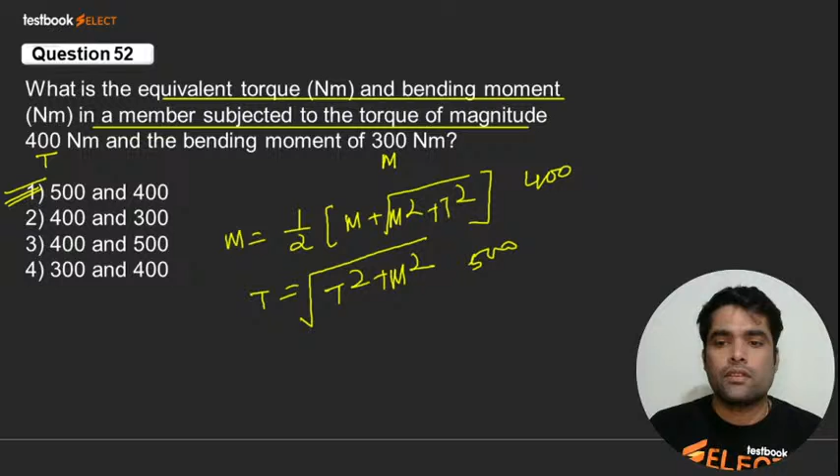A freely supported beam at its ends is loaded by a central concentrated load, central concentrated load, and the moment is M. Now, suppose the same weight is equally distributed over the beam, meaning UDL, uniformly distributed load, right? So the moment here, this moment is nothing but, if a force P is acting, it should be PL by 4, sorry, PL by 4 is there. Moment will be PL by 4 for the first condition.

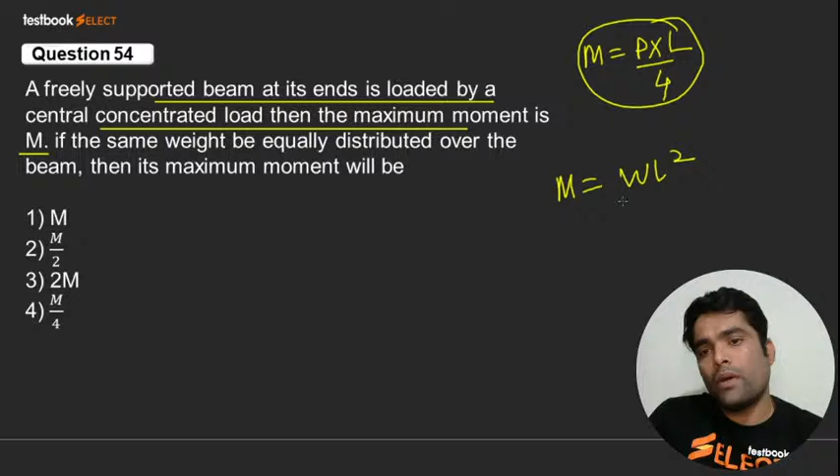For the second condition, it should be WL square by 8. But you should know that W into L is nothing but the total load, so it should be PL by 8. So PL by 8 compared to PL by 4, this is nothing but your M. So the answer will be M by 2. M by 2, very good.

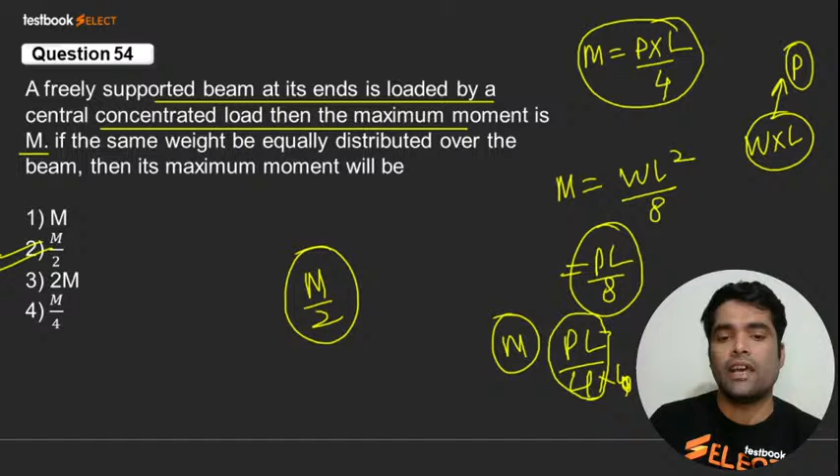No, it's not 3. Question number 54, question number 54, M by 2 is there. Here we go for the next.

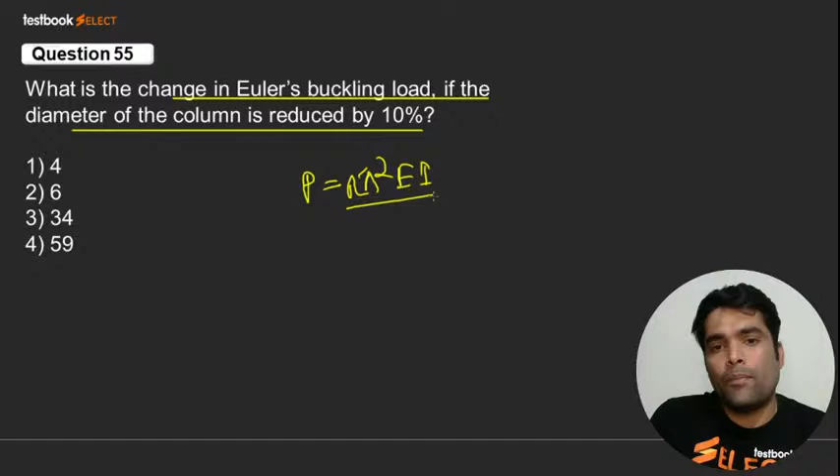What is the change in Euler buckling load if the diameter of the column is reduced by 10%? First of all, you should know the formula, right? So, P is directly proportional to pi square EI upon LE square, LE is squared.

That means P is directly proportional to I, and I is directly proportional to D raised to power 4, right? So I can say P2 by P1 equals D2 by D1 raised to power 4, and D2, since it's reduced by 10%, that means D2 is 0.9 D1 divided by D1, raised to power 4. What should be the answer? How much does this calculation give? The answer is 0.6561, this will come, right?

So if we take 1 minus, what is the change? So the change will be 1 minus 0.6561 divided by 1, so it should be around 0.34, something like 0.343, that is 34.3 something percentage, right? So it should be option number 3.

Here we go, my dear.

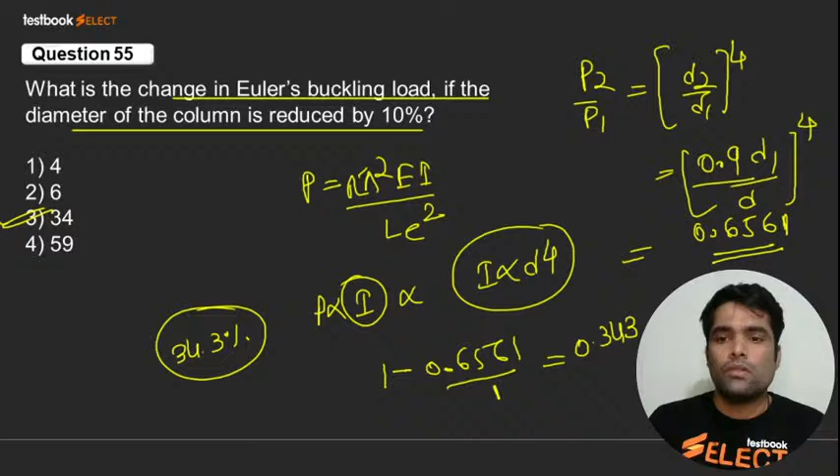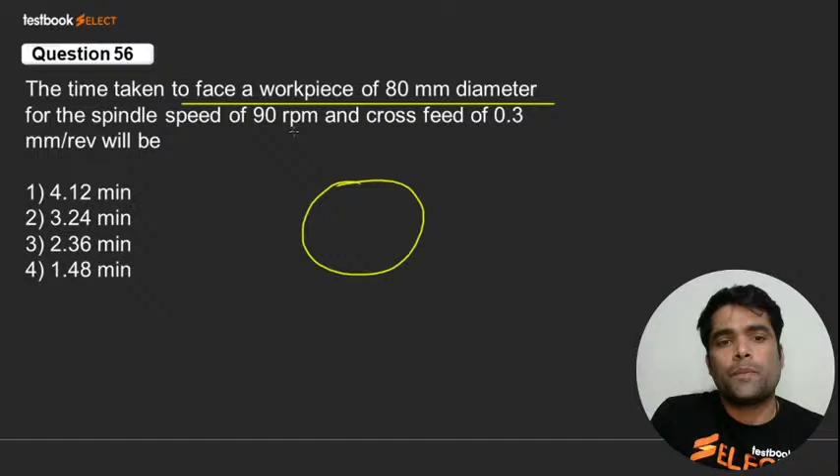The time taken to face the workpiece of 80 mm diameter. Spindle speed N is given, feed is given in mm per revolution. Time required for machining is L upon F into N. L is the facing distance, which here equals 40. F is 0.3 multiplied by N which is 90. So 40 by 27, that gives around 1.48. That is the answer.

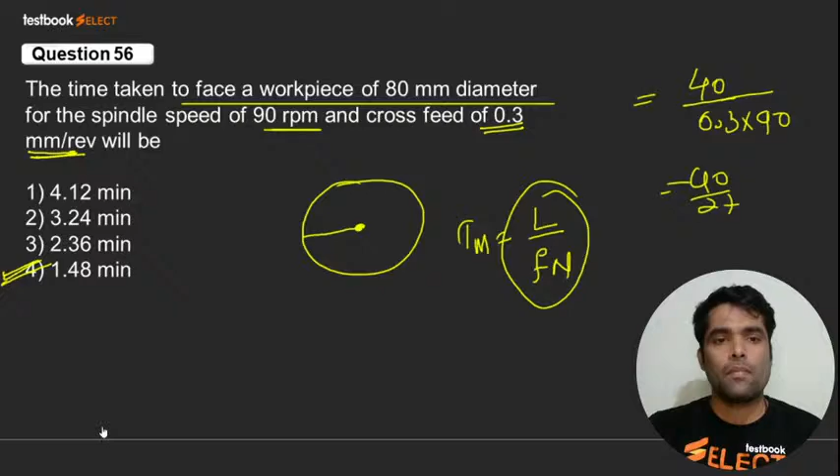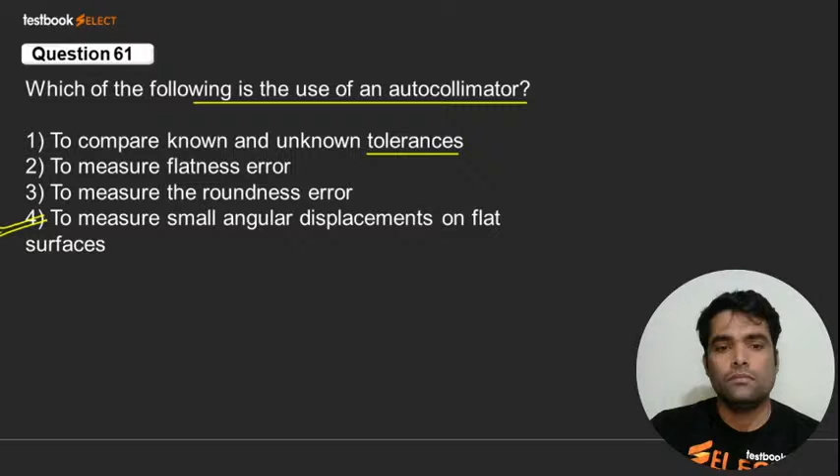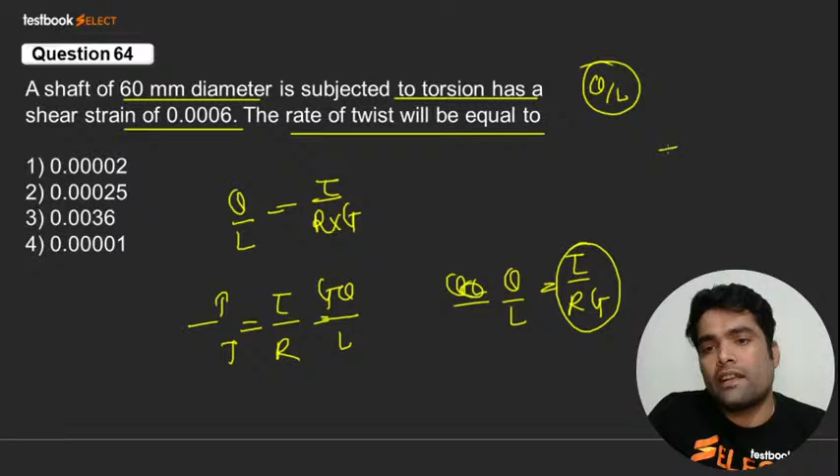It is none other than tau by radius into G, that is theta by L. From the equation T/J equals tau/R equals G theta/L, you can get this. Theta by L is equal to tau into R by G, and tau by G is nothing but shear strain. So theta by L equals shear strain by R.

Okay, one. Very good. Here we go for next.

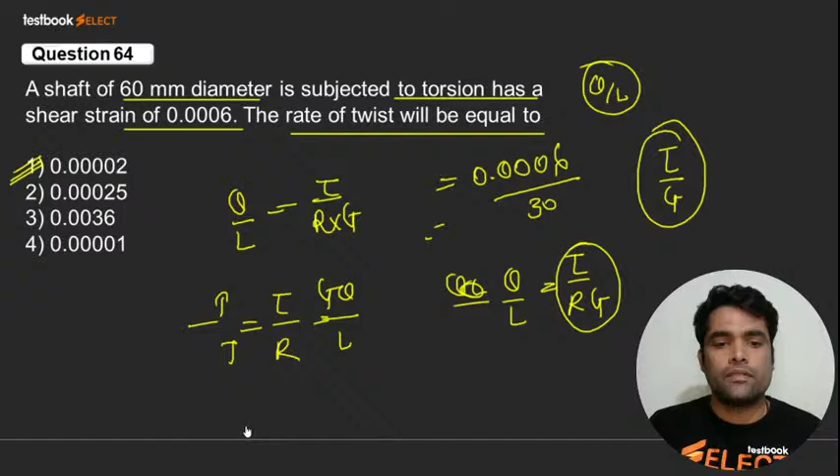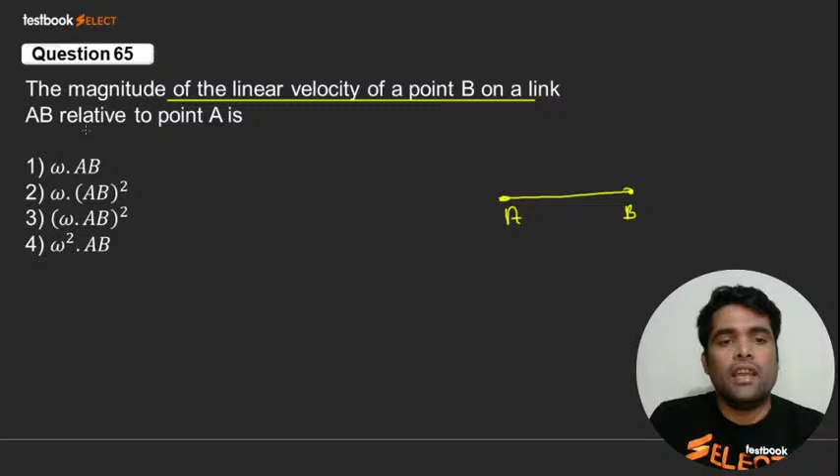The magnitude of the linear velocity of a point B on a link AB. Okay, suppose this is a link AB or BA, relative to point A, and we need to determine its velocity with respect to A. So what should it be? That is linear velocity, which is R into omega. R is nothing but the distance, that is the length of AB multiplied by omega. So it will be length of AB multiplied by omega. Okay, I hope you got it. Okay, here we go.

Okay, one is correct.

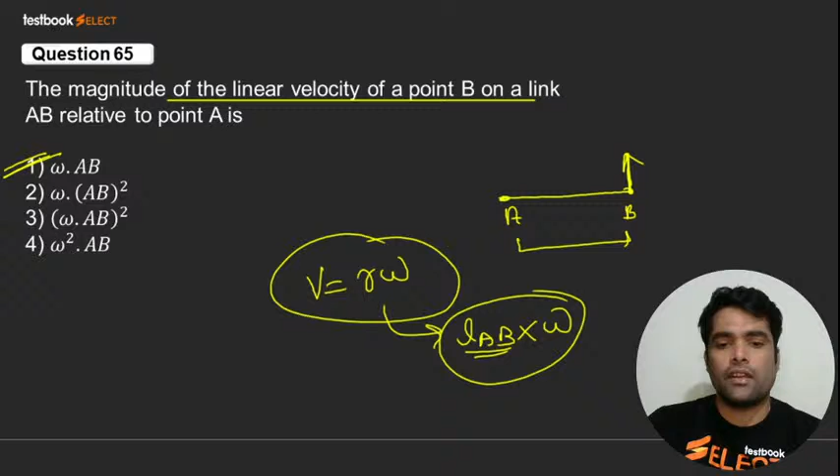Ratio of number of atoms present in simple cubic, body centered, and face centered structure. You know SC is there, BCC is there, FCC is there, HCP is there, right? Let me tell you in detail, each and everything. Sometimes you're asked the coordination number - what is it? 6, 8, 12, 12. And here they have asked, what, my dear? Number of atoms, right? So it should be 1, 2, 4, 6. Okay.

Atomic packing factor - what is it? APF, atomic packing factor, 52, 68, 74, 74. So what should be the ratio? That is 1 to 2 to 4. 1 to 2 to 4. Very good. Here we go for next.

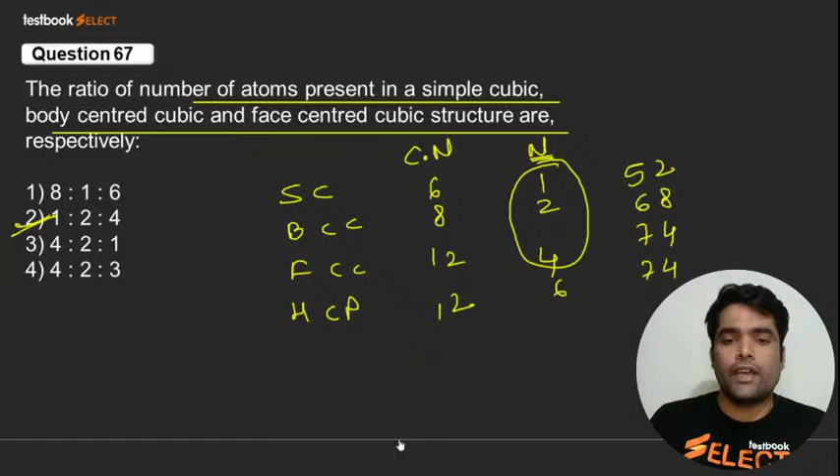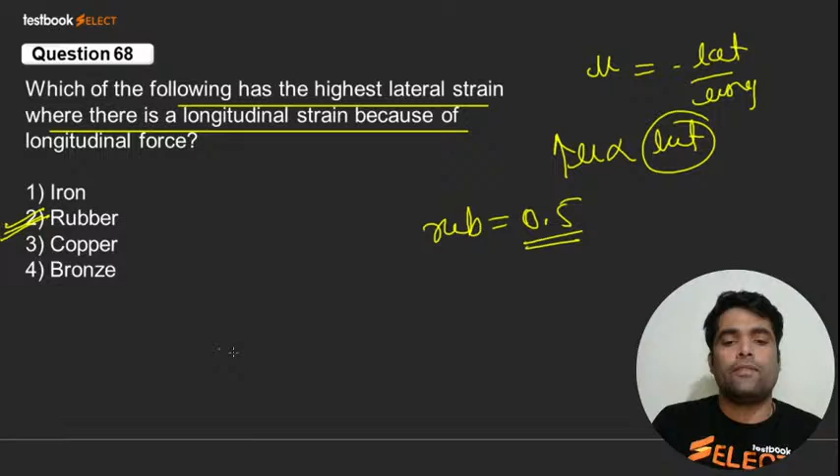Which of the following has the highest lateral strain where there is a longitudinal strain? You should know whichever has higher mu, because mu is nothing but minus of lateral strain divided by longitudinal strain. That means mu is directly proportional to lateral strain. So whichever has higher mu has higher lateral strain. And you know that for rubber it's almost 0.5 definitely. For copper, how much is it? Copper is 0.33, sorry 0.34 for bronze, 0.33 for copper. For iron, it is none other than 0.25.

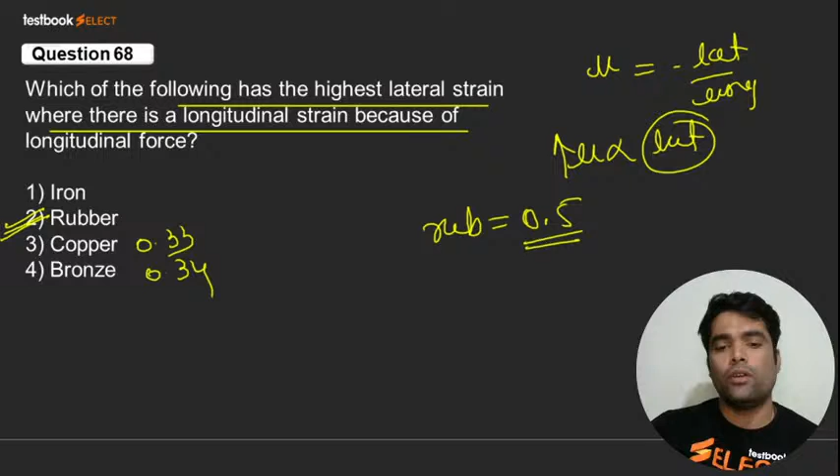Here we go for next, my dear.

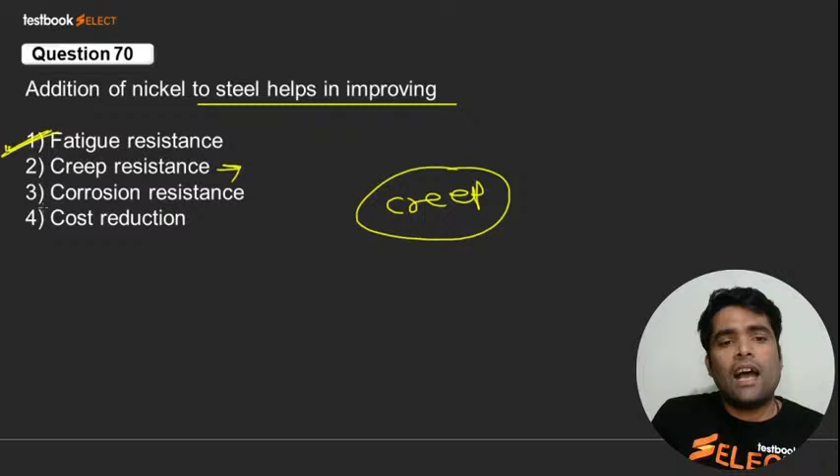Nickel improves fatigue strength. Okay, here we go.

Here we go, my dear. Okay.

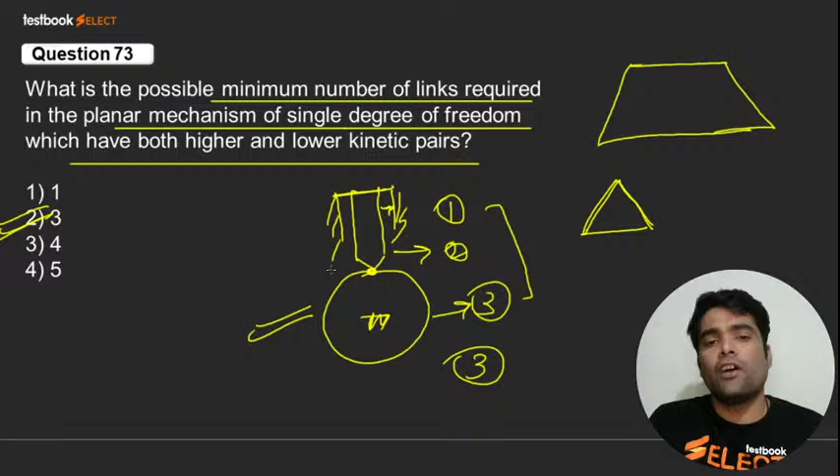Here we go for next. In a 2-stage wire drawing operation, the fractional reduction - that is ratio of change in cross-sectional area to initial cross-sectional area - in the first stage is 0.4, fractional reduction in the second stage is 0.3. The overall reduction, my dear, you have to tell me. Yes, can you tell me the overall reduction?

Be fast - so first, what is given to us? In the first one, we are provided with 1 minus A1 upon A naught, given as 0.4. In second, 1 minus A2 upon A1, that is 0.3, right? And what is asked from us - overall reduction, that is 1 minus A2 by A naught - what will that be?

You know that area is directly proportional to diameter square. So can I say 1 minus D1 square upon D naught square is 0.4? From here I'll get D1 square upon D naught square is 1 minus 0.4, that is 0.6. So definitely D1 is root 0.6 D naught, right?

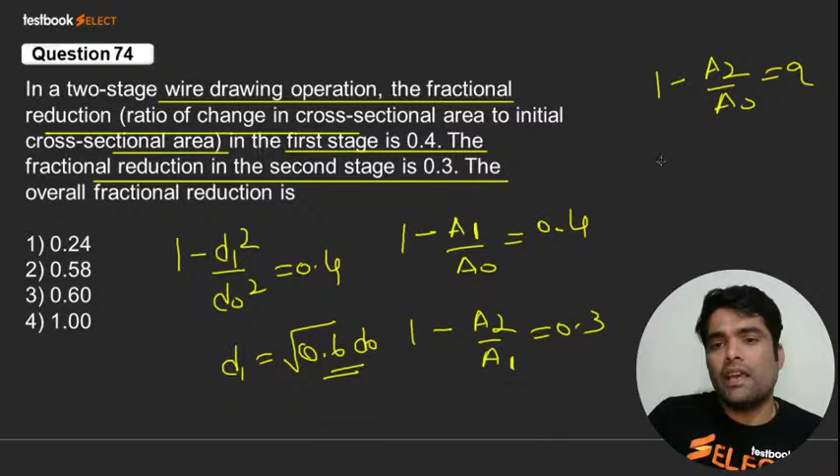From here I can write 1 minus D2 square upon D1 square is equal to 0.3. So here it becomes 0.7. That means D2 square is equal to D1 square into 0.7. So what am I getting? 0.6 into 0.7.

What, D naught square is equal to what, my dear? D2 square - yes or no? Just put this value over here and you'll get the answer. Here you got D2. So you put D2 square, that is 0.6 multiplied by 0.7, D naught square - these will cancel. And you are going to get 1 minus 0.42. So what will the answer be?

Something like 0.58 - yes, 0.58. Yes or no? Of course you got it.

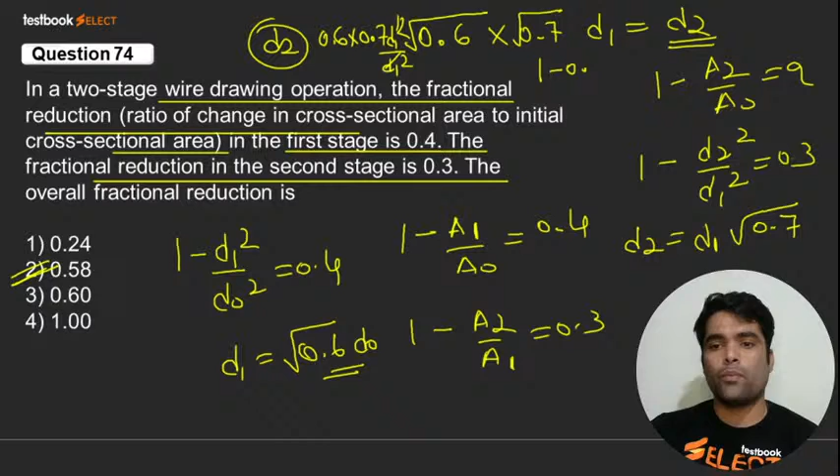Very good, 0.58. Here we go, here we go for next.

Consider the torsion equation given below: T by J, tau by R, G theta by L. What is the term J by R? Is it section modulus? No, it is polar modulus. Yes, it is polar modulus.

Here we go for next one.

When ordering cost is increased to 64 times, then EOQ - you know that Q is directly proportional to under root of CO, because we know that Q is equal to root of 2 D CO by CH, right? So this will be 64, so definitely it will be increased by 8 times.

Yes or no? Of course it is, right? Here we go.

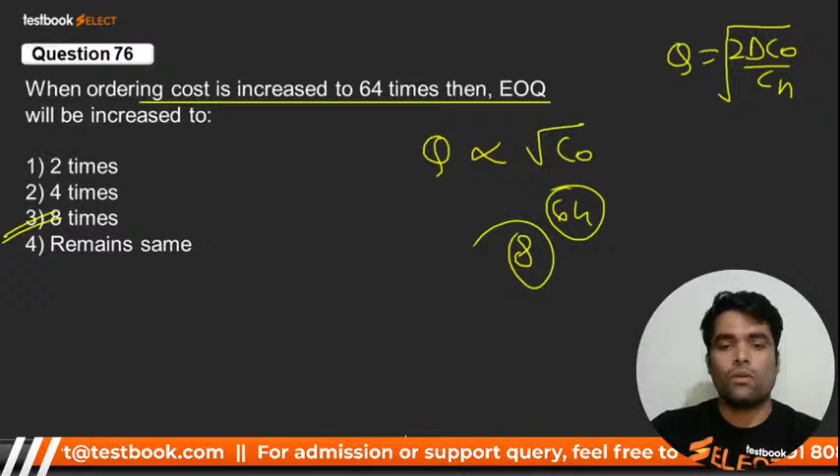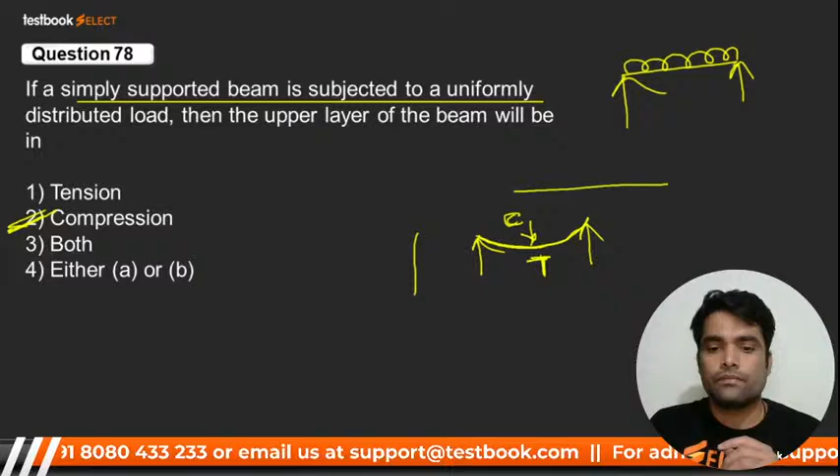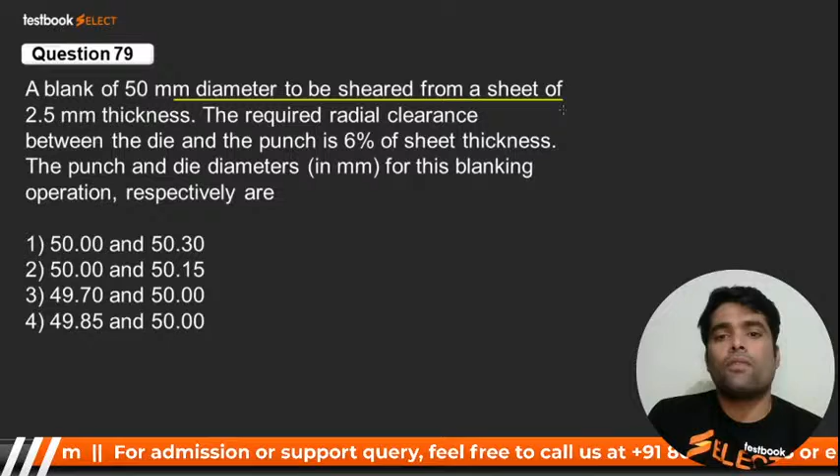A blank of 50 mm dia is to be sheared from a sheet of 2.5 mm thickness. The required radial clearance is 6% of sheet thickness. Okay, the punch and die diameters for this blanking operation - you should know that in blanking operation we have the exact size for the die. Die is of exact size.

That is none other than the size of the product. And punch size is nothing but die size minus 2 into clearance. Clearance is 0.06 multiplied by 2.5 - 6% of thickness is stated.

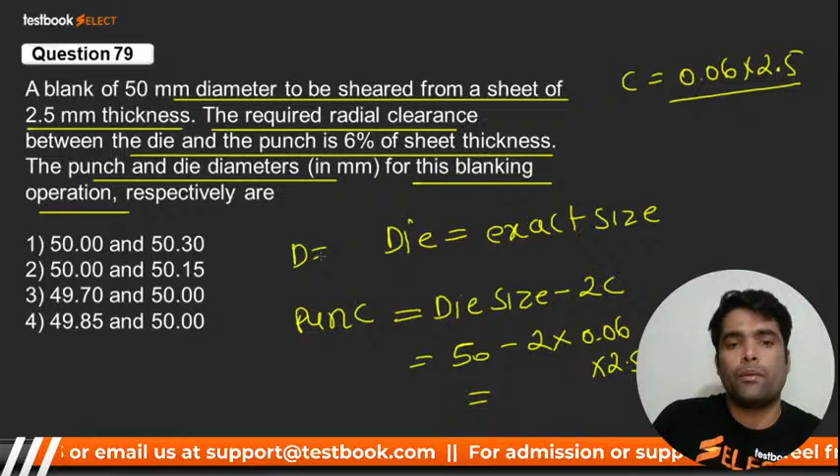Right now, put the value, get the answer. Die size we want is 50. So 50 minus 2 into C, where C is 0.06 multiplied by 2.5. This will be exact size, that means die will be of 50. Die size will be 50, right? So what is the answer? 49.70, that's what we're getting. So the answer will be - what was asked?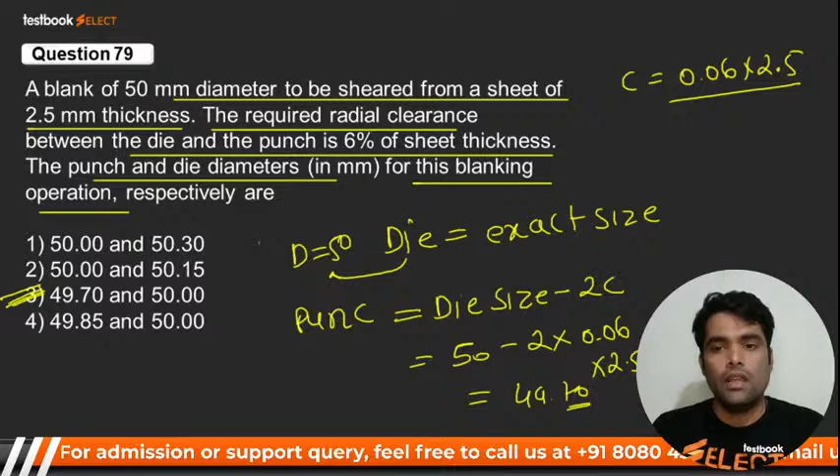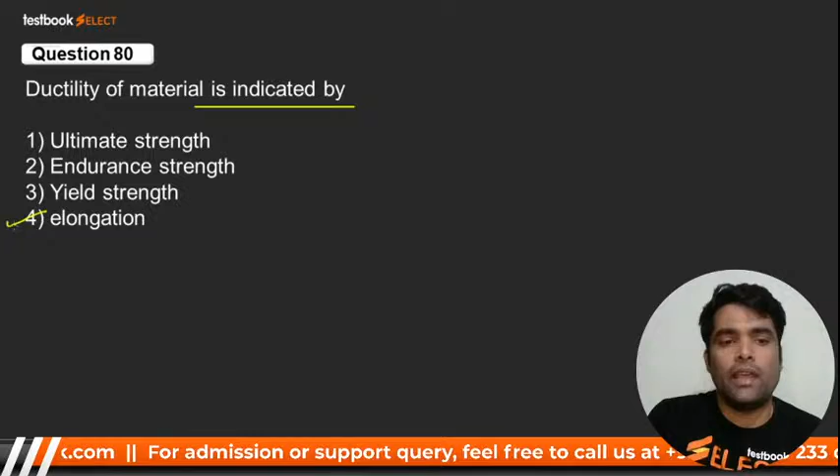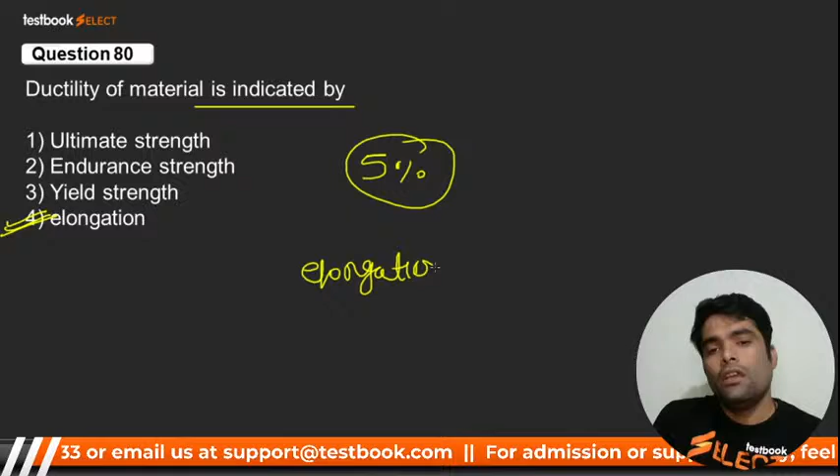Ductility of material is indicated by - which of these indicates ductility: ultimate, endurance, yield or elongation? Please tell me the answer. It should be elongation. If any material wants to be concluded as ductile material, we only conclude this when elongation is more than 5%.

Here we go. Elongation. Here we go for next.

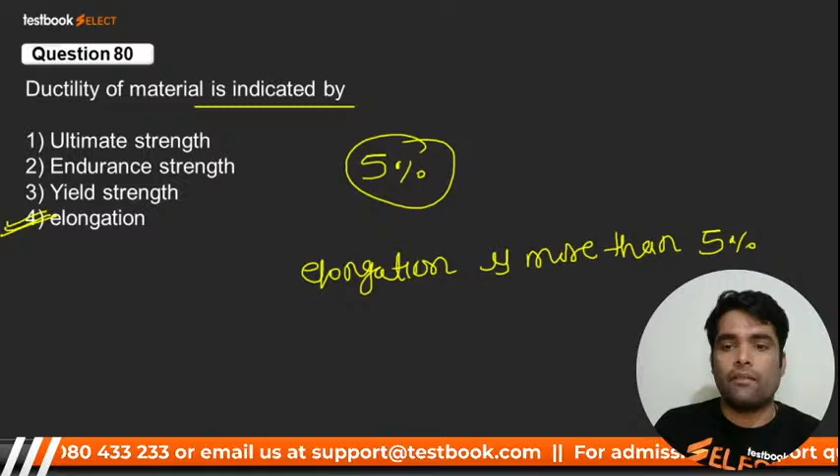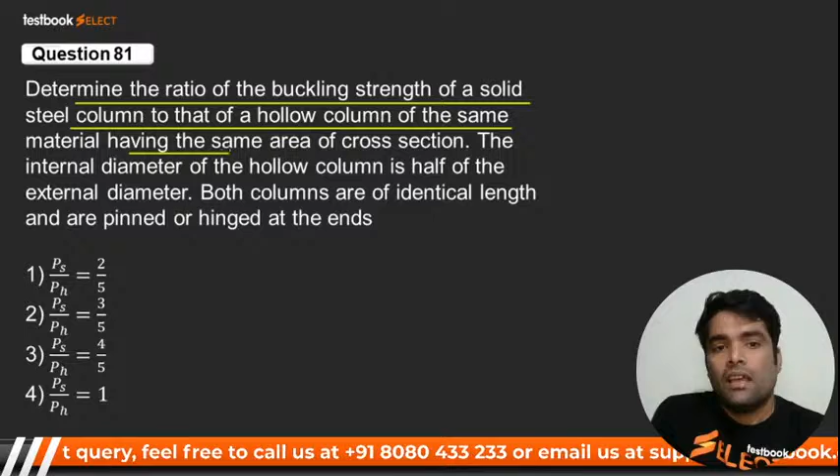Determine the ratio of buckling strength of a solid steel column to that of a hollow column of the same material, same area of cross section. The internal dia of the hollow column is half - DO by 2, that is half of the external dia, as stated. Both columns are of identical length and pin or hinge at ends.

Guys, please tell me the answer for it. First of all, you should know that I is directly proportional to load, right?

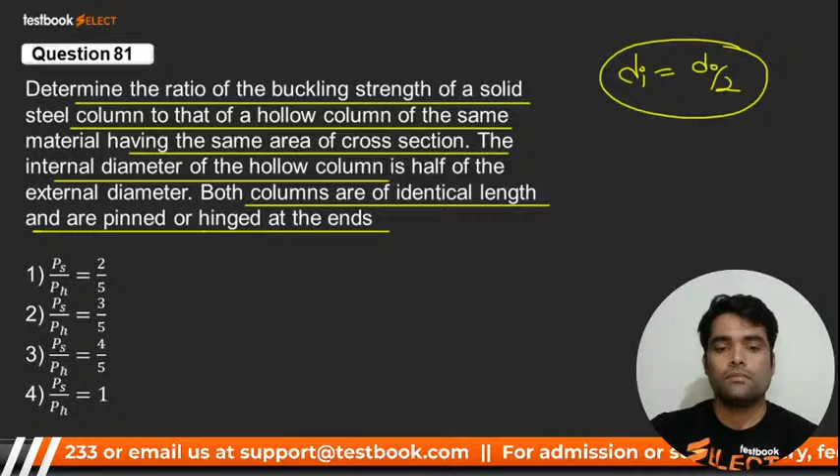P is directly proportional to I. I will not write the formula each and every time, we've already written it. And I is directly proportional to D raised to power 4. We've been asked PS by PH. So PS will be what? It will be D raised to power 4.

And what will this be? Solid hollow ka, that should be none other than what? D raised to power 4, meaning internal. External, D raised to power 4 minus Di raised to power 4. Yes or no? Of course.

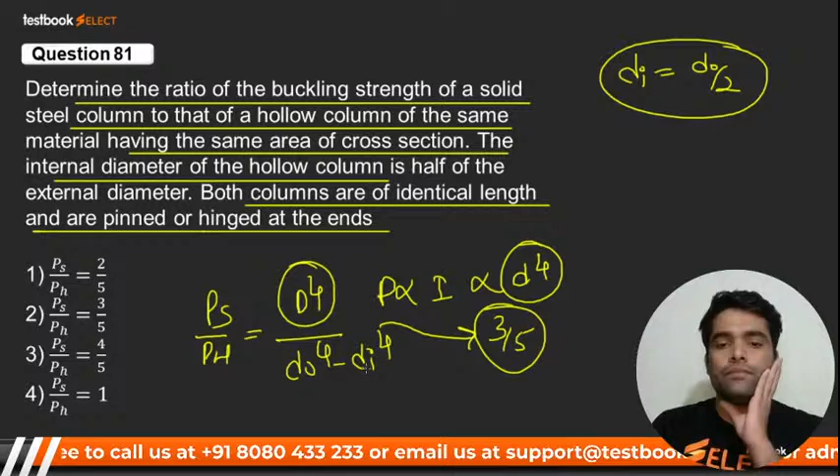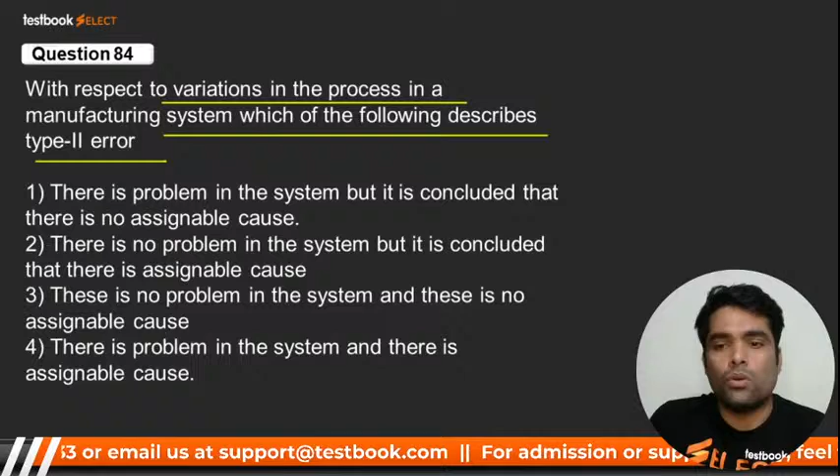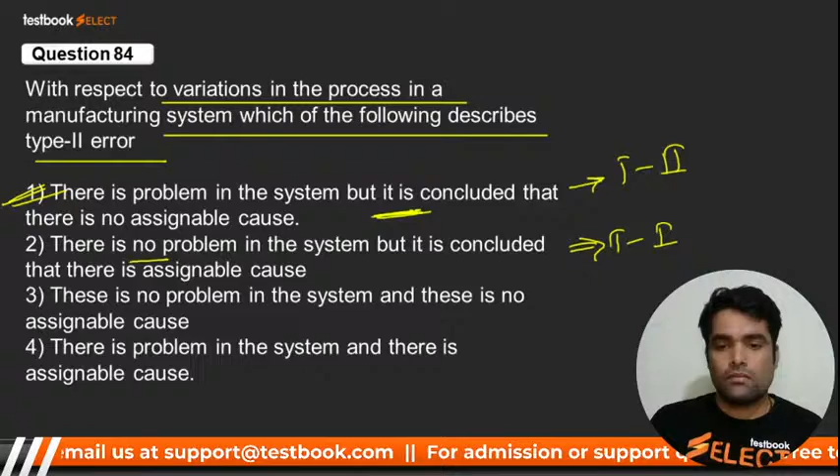Here we go for next. Yes, because the mean speed - it controls only speed, and it is a cyclic device.

Okay, number of instantaneous centers, if n is the number of links in the mechanism, what is the formula? It is n into n minus 1 by 2. Now which one is correct? Option number 1, option number 1. Tick the option number 1.

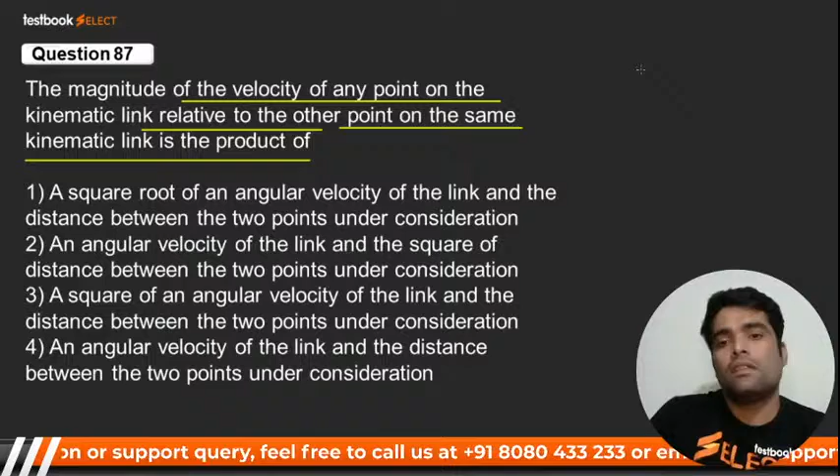Here we go for next. That is the magnitude of the velocity of any point on the kinematic link relative to the other point on the same kinematic link is the product of what? Let's take any point A and point B. So it's asking about our relative velocity, that is V of B with respect to A.

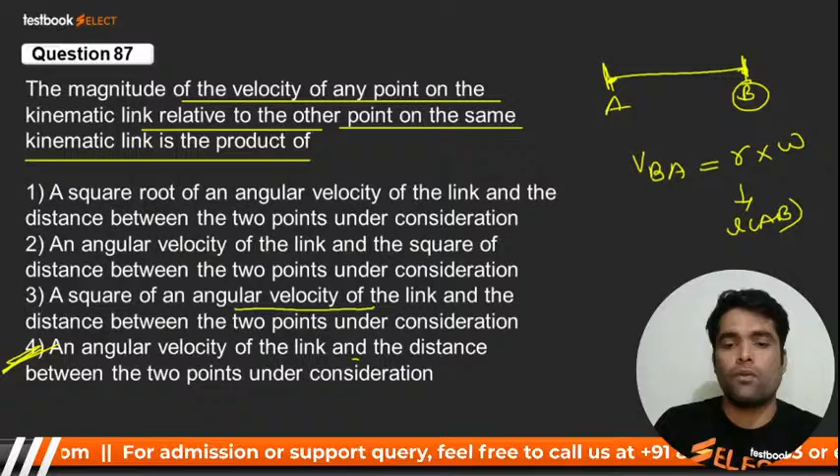That means this one, right? Option number 4 is correct. Very good. Here we go for next.

Transmissibility is defined as the ratio of force transmitted to the foundation to the input force. Option number 2. It's a very easy question from Theory of Machines.

Now see, here we go. The buckling load of a given material depends on - what does it depend on? It depends on the slenderness ratio. Yes or no? Guys please tell me. Yes teacher.

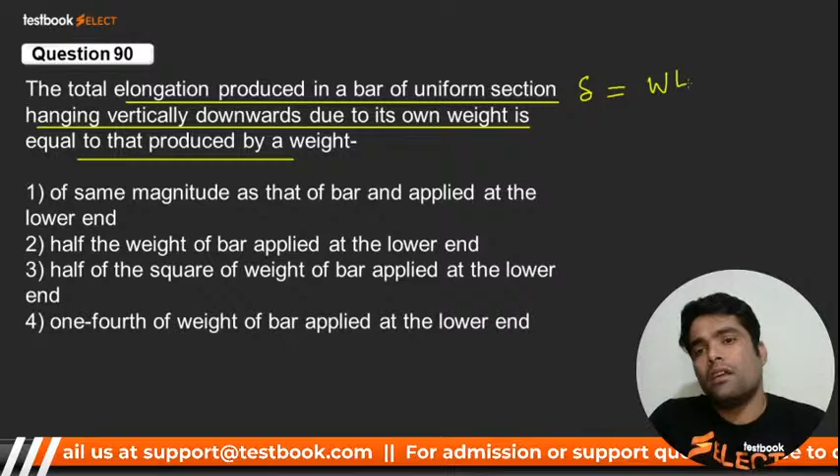You know that due to self weight, the deflection from self weight is nothing but WL upon 2AE. And deflection due to applied load should be none other than PL by AE, and these two are equal, right? Both are equal. So AE cancels, L cancels. What are you getting? You are getting P equals what?

W by 2. So what it should be - half the weight of the bar applied at the lower end. Not half the square of the weight. Which one is correct, my dear? Now tell me the answer.

What should it be? It should be none other than half the weight of the bar applied at the lower end. Right? I hope you got it better. I hope you got it. Here we go for next. Very good.

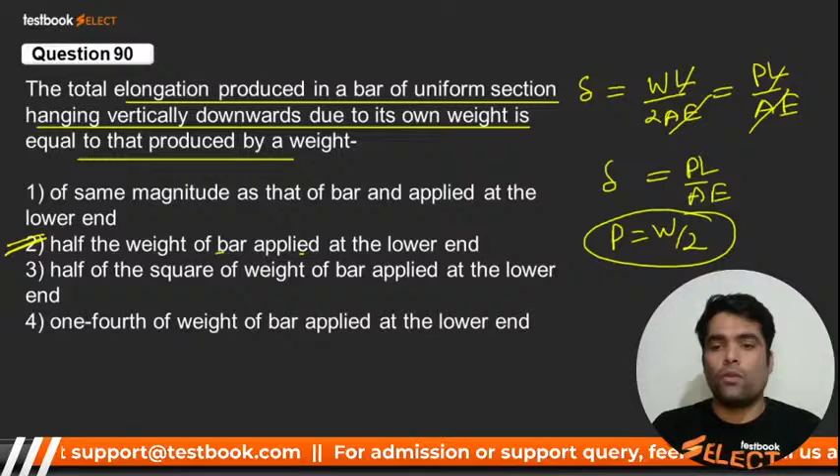Constraints in a linear programming model represent - what do they represent? This is a repeated question. It is a repeated question - requirements, limitations, balancing, all of the above.

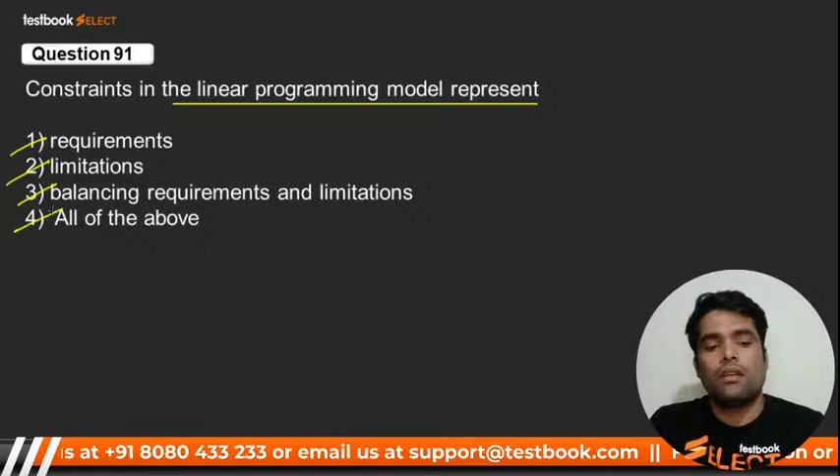Okay, the process capability of a machine can be determined by - how will it be determined? By X and R chart. Not by P chart. Both X and R chart need to be used. Okay, both need to be used. Very good.

Very good, the fourth option is correct. Here we go for next. Here we go for next, my dear.

While solving a linear programming model, if a redundant constraint is added, there is no effect. This is a repeated question - there will be no effect.

Redundant, yes. 92, number 1, there is no effect, right? Yes. Here we go for next, my dear.

Which of the following is the relation between Young's modulus E and G? Twice G times 1 plus mu is nothing but E, right? Thrice K times 1 minus twice mu - yes or no? So it should be twice G times 1 plus mu. Number 3.

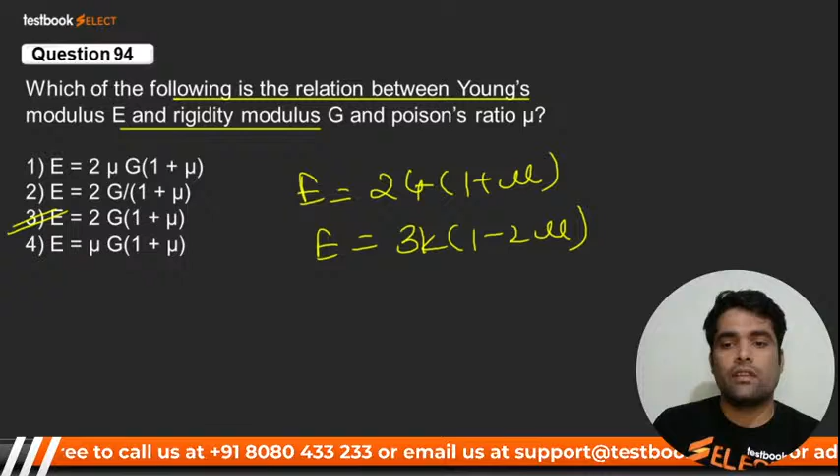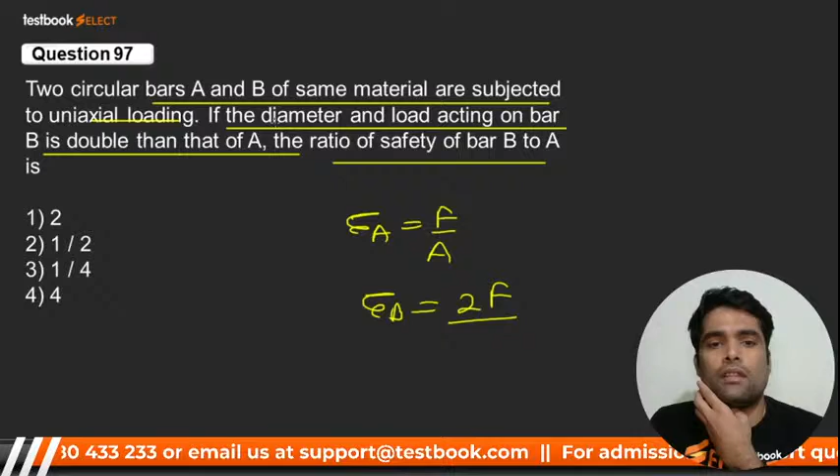The load acting on the bar is double, that is force is double, and the diameter is also double - diameter means d square. A is directly proportional to d square, so 4a will come here. It should be 4a, that is 1/2 right now.

So the ratio of B to A is asked - B to A becomes 2. B to A, what it should be, that is 1/2. F upon A multiplied by - that is F by A becomes A by F.

1/2. No, I think there is something wrong, we have done a mistake somewhere. Here, ratio of factor of safety B to A - wait, B to A, we have put this, is it correct? We have 1/2 coming, I think 1/2 itself will be the answer.

Here we go for next. Check whether it's 1/2 or 2, do the calculation yourself, but 1/2 is there.

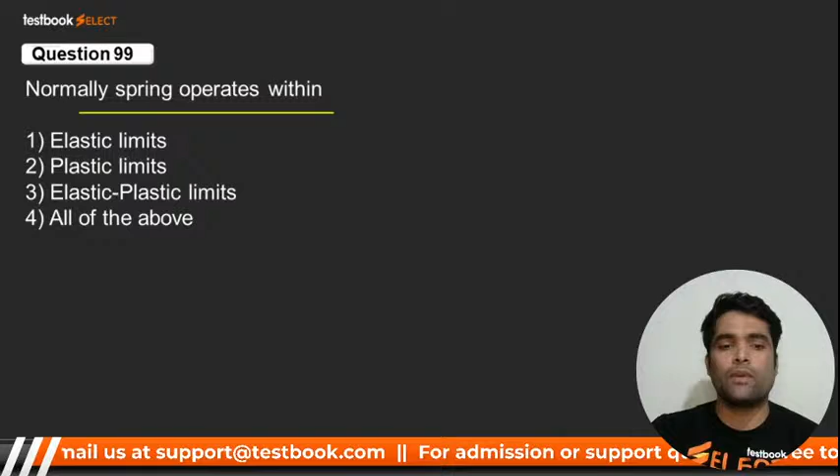It will operate within elastic limits. I hope you got it. Here we go for next.

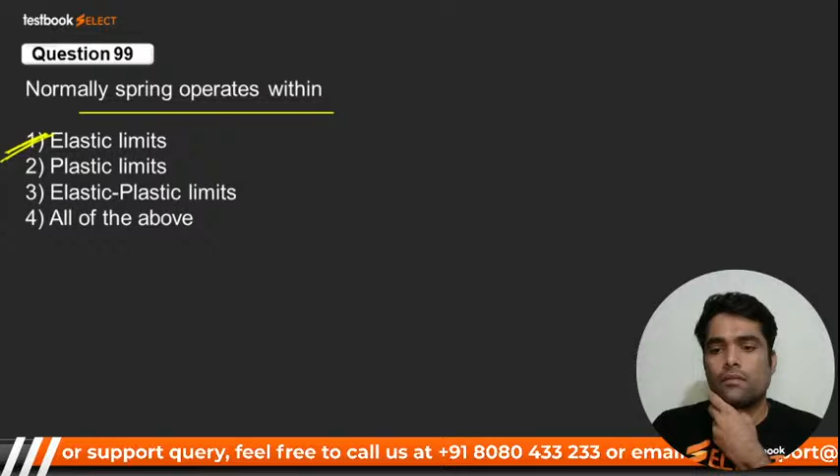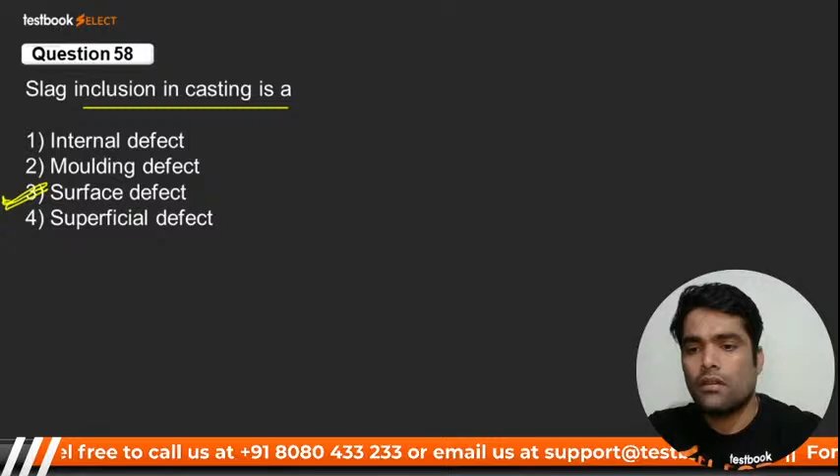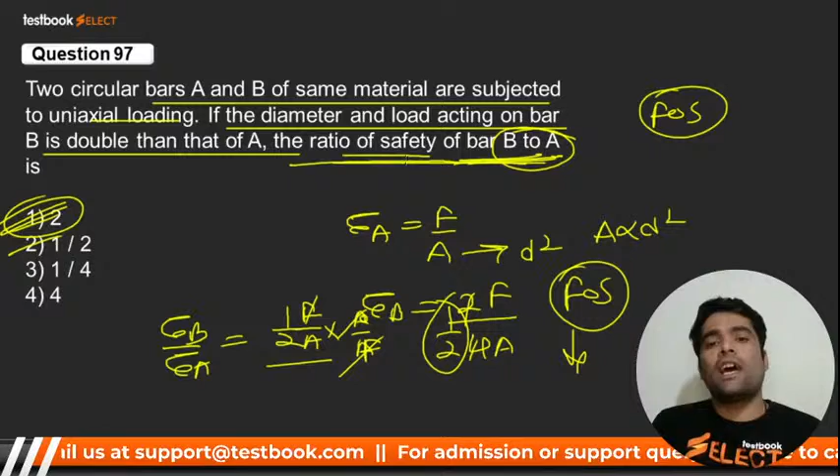Circular bars A and B of the same material are subjected to loads; here the ratio of factor of safety is asked, my dear. So here we will not take B by A, take A by B. A by B means the answer will be 1:2, the answer will be 2, not 1 by 2. Yes, factor of safety is asked here, didn't pay attention to that. It is ratio of safety, not ratio of stresses that's asked, so definitely it is 2, it's not 1 by 2. Okay, we'll do A by B.